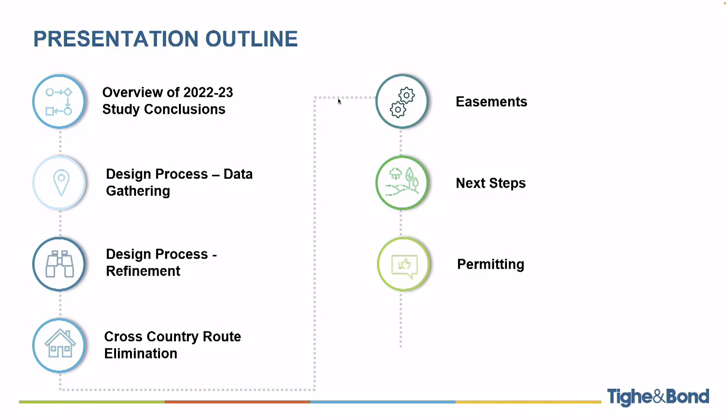And finally, as Ed said, we'll wrap up, and then feel free to ask questions—we'll provide our answers to the best of our ability. If we don't have an answer for you tonight, we will get back to you.

To recap our presentation from May 2023, some key takeaways: the existing storm drainage system in the Saltbox Lane area is extremely undersized. It only handles a 2-year event, which is about 3 to 4 inches of rainfall in a 24-hour period. For reference, the Town of Darien design standard is a 25-year design storm—you're up at about 5.5 to 6 inches of rain in a 24-hour period if that system were designed today.

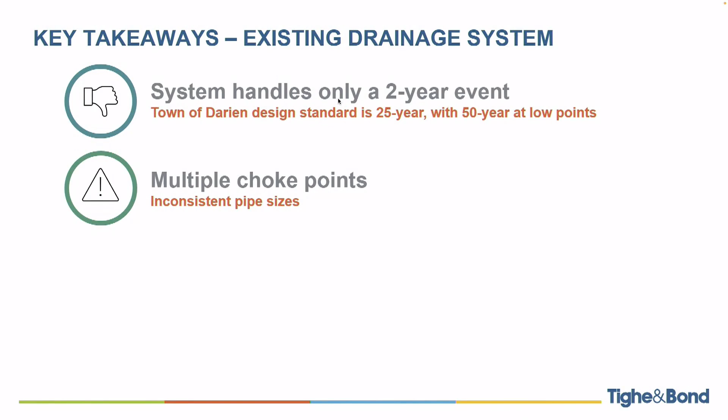Also, at low points, there's a 50-year standard in Darien. The system also has multiple choke points—pipe sizing is inconsistent. You'll have a smaller pipe go into a larger pipe, and that larger pipe go into a smaller pipe again. Never a good thing. There's also increasing precipitation depth and frequency.

Most of you who live in Darien have probably experienced it—the storms are more intense now, we're seeing more rainfall, and it tends to be more intense. That's changed since this system was first constructed in the 1950s. The final key takeaway is that there are certainly opportunities for improvement—not only increasing pipe sizes, but also improving sediment capture and other opportunities for water quality improvement.

So some of the conclusions we had from our study: because most of these streets in the Saltbox Lane neighborhood were built out in the 50s and 60s, they were designed to the standards in effect back then. As we know, rainfall has gotten more intense, and they've just become undersized as weather patterns have changed.

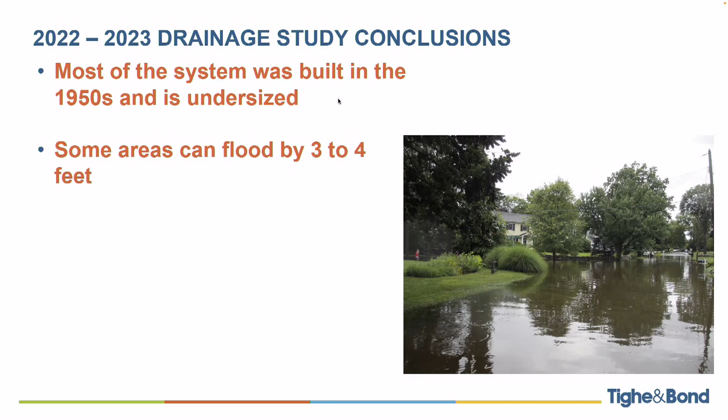We've also found, based on photo documentation, that some areas can flood by about 3 to 4 feet of water. It's not there for days on end, but an intersection still goes underwater. It is a problem for emergency vehicles, so that's something that needs to be addressed.

The other thing we found is that a lot of the catch basins don't have adequate sumps. The sump is the portion of the catch basin below the lowest pipe that enables debris, such as road sand or leaves, to be captured in the sump instead of being discharged out through the pipe.

Finally, because of the number of low points along these roadways on Saltbox Lane, Coach Lamp, and Du Bois, we recommended a 50-year design for the entire pipe network. Remember, the town standard is a 25-year design.

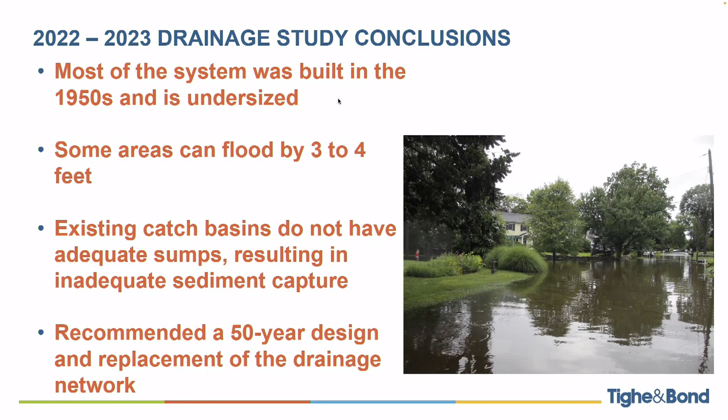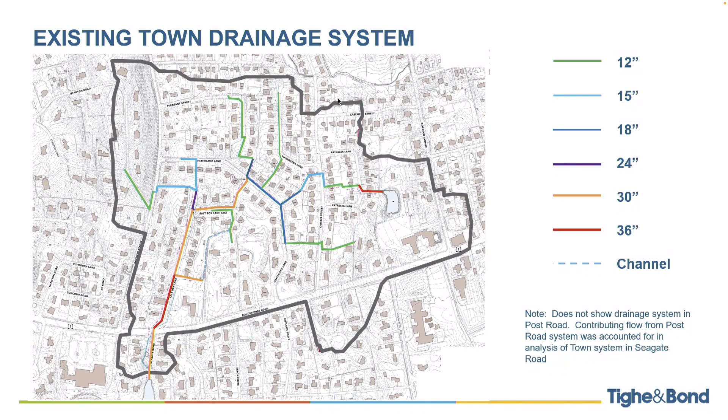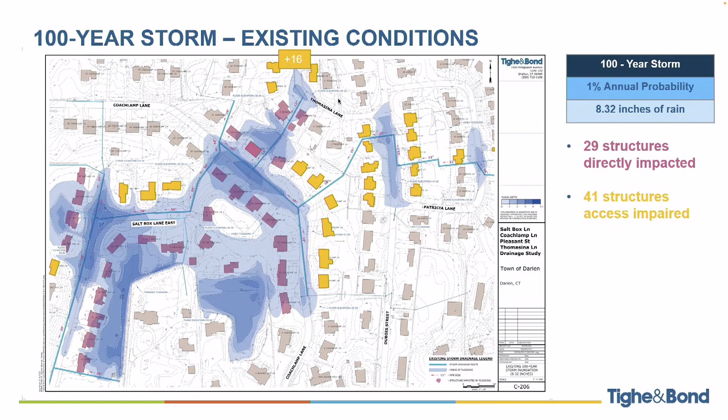Now for a 100-year storm, you can see how that grows, because we go from a little shy of 7.5 inches of rain to 8.3 inches of rain in that same 24-hour period. The number of structures directly impacted increases to 29, shown in pink. Then 41 structures are access impaired, including 16 up here on Thomasina that are off the graph.

So the proposed system: here we have a box culvert that comes down Saltbox Lane from the Saltbox Lane East intersection. It measures 5 feet wide, 3 feet high, and it comes across the Post Road and then discharges down Seagate Road into Holly Pond.

You can see we're increasing a lot of the pipe sizes to larger pipes. You have a 48-inch coming down Saltbox Lane East, which used to be a 30. But the key takeaway is our model does not show any of the catch basins with surcharge in a storm event. The dashed darker blue line is the extent of the 50-year flood under existing conditions, and you can see we're not expecting any ponding in the 50-year event.

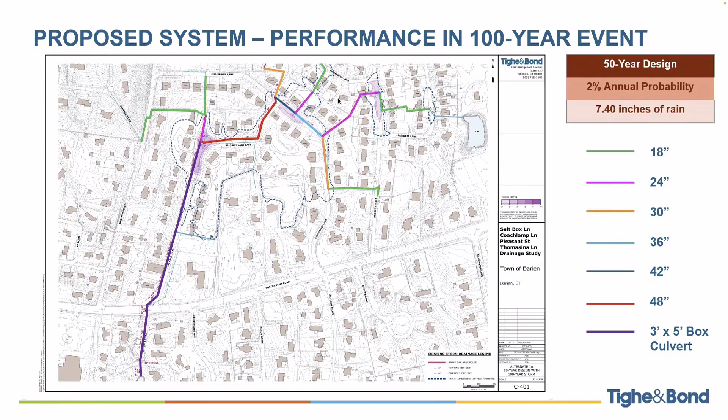We also looked at the proposed system's performance for the 100-year storm event. I apologize, this graphic is incorrect - I just noticed this should be 100 here, 1%, and 8.32 inches of rain. You'll see areas of purple here, here, and here - those are areas that would flood, but the flooding is 1 foot or less. If you compare that to the present limit of flooding expected for the 100-year event, you can see that this would shrink that quite a bit.

So I mentioned pipes and box culverts. I want to clarify the difference between the two. Pipes are traditionally what you think of - they're round. In this case, we're looking at either reinforced concrete pipe, or for some of the smaller pipes, PVC. The key advantage is they're readily available, easier to install, and lower cost. They don't carry as much as a box culvert, though.

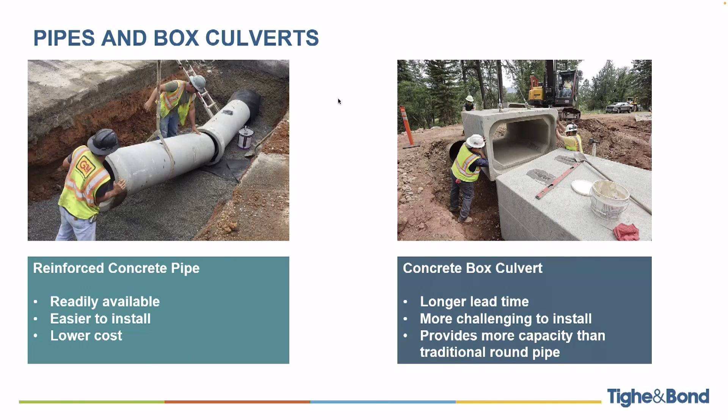The concrete box culvert has a longer lead time. It's more challenging to install - you can see you got 2 guys here, and 3 guys in this one - just because it's larger and heavier. But the key advantage is that it provides a lot more capacity than your traditional round pipe. That's why we selected the box culvert to go down Saltbox Lane and down to Seagate. Otherwise, we'd be looking at a pipe that was probably about 5.5, maybe even 6 feet in diameter.

So that was an overview of our study recommendations. Since that time, we've started the design. There was a selected alternate, and we've moved forward with that. In order to design, we need a lot more specific information than we would need for a study, so the first step was having a topographic survey and a utility survey done of the work area.

That's been completed, and what that does is tell us the elevations of the road along the entire length of the project area. It also tells us how deep the pipes are, what the rim elevations are, where utilities are - not all the utilities, but it's the cornerstone of the design.

Then there's a field review. We review the survey, and sometimes there are things that don't make sense, so we'll go back out in the field, take a look, and make notes and adjustments based on that.

And there are things you can't see - we can't see into the pipes under the ground. So if there are additional questions, like where does this pipe really connect, the surveyor can't really see where it goes. So what we do is video record certain pipe segments that we still have questions about, and we did that process.

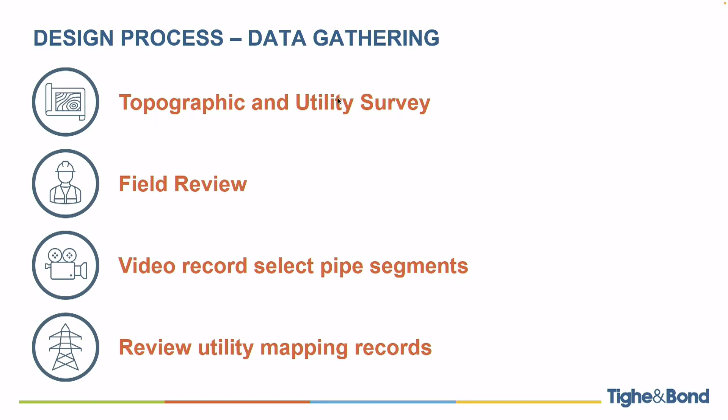Although our survey does have utility information on it, we also go back to the utility companies and get their mapping as well, just to see what's changed or if anything might have been missed on the survey. We've completed all those steps. With the utility mapping, it's important to understand where the utilities are to try to minimize conflicts, to make sure we're not installing pipe right through an electric duct bank or something, because that would only slow down the construction process.

We want to keep that moving as efficient as possible, so that's why we take a look at the utility mapping. We do have some potential conflicts we're working with Eversource and Aquarion on between some underground electric and some water mains, and we're working through that process. Requesting utility mapping also alerts the utility companies to the project - we reached out and got mapping, and you'll be surprised at the number of utility companies we had to contact.

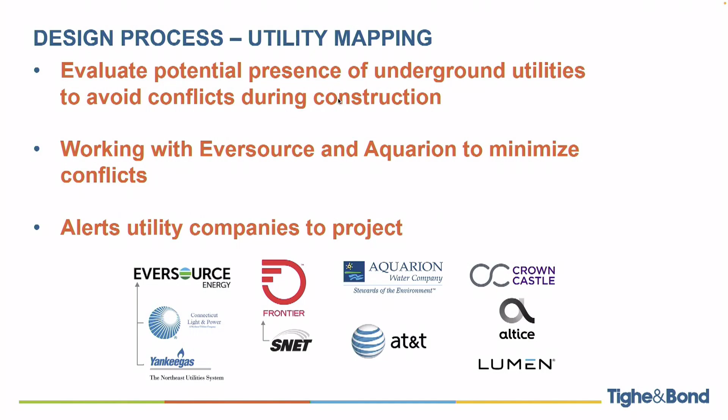Some of these I didn't even know existed, but we were made aware of it, and we did get information from them. So all that is information that we use to bring into the design.

I want to reiterate our design goals. These are our primary design goals. The first, obviously, as a drainage project, is to reduce flooding. The other is minimizing construction impact. The way we lay the pipes out, how deep they are, it all has an impact on how things are constructed, so we want to do that as efficiently as possible. We try to minimize the impacts on roads and minimize detours. So those are all things that go into the design process.

Also minimize easements. Easements are costly. It takes time to get them, and it's always better to have something you can maintain in your right-of-way to the extent that you can. Sometimes that's not always possible due to topography or other reasons, but we try to minimize them where possible.

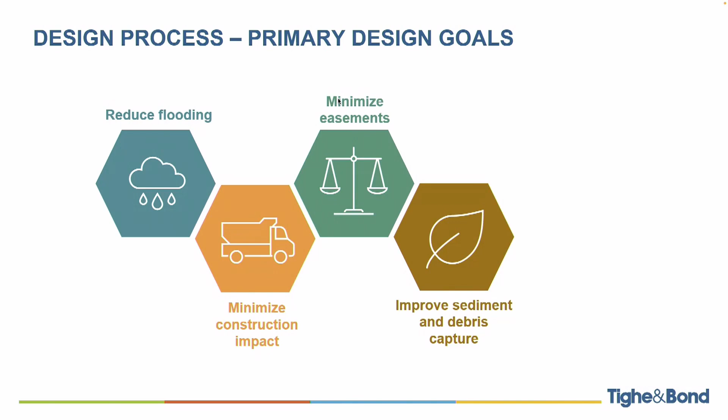In addition to being a flood reduction project, this also is an opportunity to improve water quality. So some of the things we look at are the types of basins we're replacing, to improve sediment and debris capture, and how we can minimize the amount of sediment that's being transported to the system and ultimately to Holly Pond.

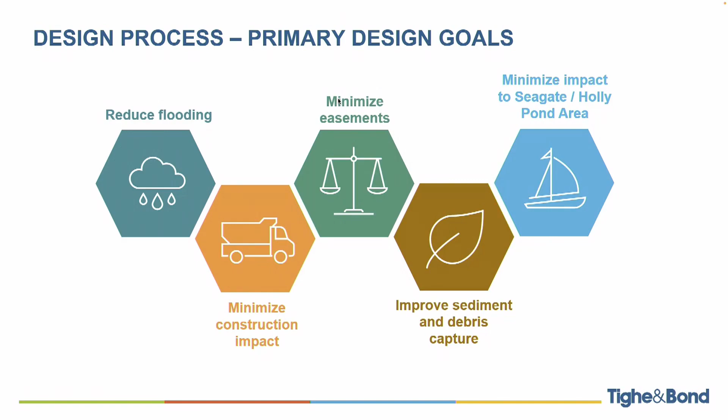Although this is a real flood reduction project for much of the study area north of the Post Road, south of the Post Road in Seagate Lane it's a little different. They're affected differently and don't have the flooding issues that residents north of the Post Road experience. So it's important that we're also sensitive to their concerns, and we've had a few meetings with the neighbors there.

So we have all this information. We start to place our pipes on the plans, try to figure out the best way to connect them and where they should go, and then we start to refine the design.

The first consideration is the horizontal alignment of the pipes - where the pipe fits in the roadway and how it connects to other pipes. Here again, reduction of easements comes in, and we also have to consider traffic operations.

If you run a pipe straight down the middle of the road, you're probably going to have to close that road for construction, which would unduly burden residents. So what we try to do is shift that pipe to one side of the road or the other, so you can have at least alternating one-way traffic.

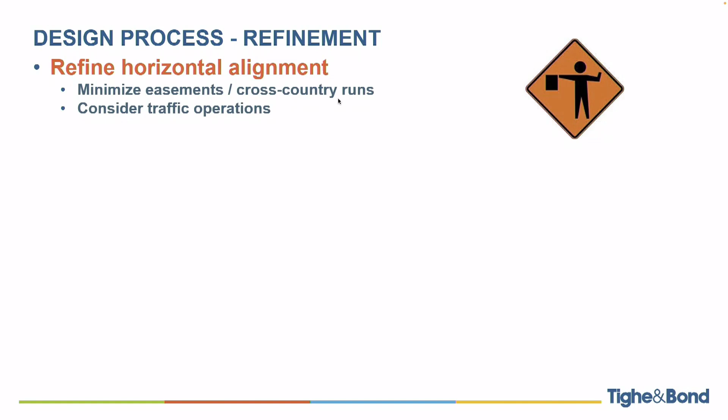There will be times where the contractor might reach out to a resident to understand their schedule, since they might need to block a driveway temporarily for a couple hours. We obviously try to keep that to a minimum, but that's unfortunately a reality of construction.

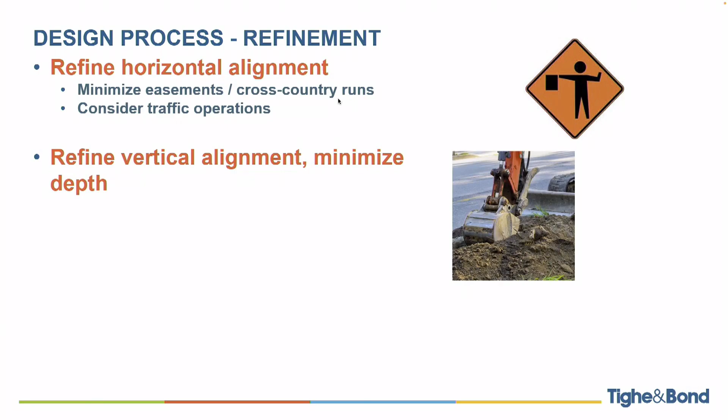We also look at the vertical alignment, which is basically how deep the pipes are. We want to minimize the depth, but also place them to minimize utility conflicts. If we put a pipe too high, we might conflict with underground electric. If we put it too low, it could be too deep, causing additional construction expense, or it could conflict with sanitary sewer. So there's a lot of different things we look at there.

Adjusting for utility conflicts is another consideration. If you're trenching on one side of the road or the other, you might be close to a utility pole, so we have to call out on the plans that certain utility poles need temporary support during construction as they trench past that pole. We also look at edge impacts.

There are a lot of driveways in the area, so we have to be cognizant of what we're disturbing - driveway aprons, making sure that if we're disturbing Belgian block aprons, the homeowner is aware of it and that it's reflected in the contractor's bid price, as well as mailboxes getting reset, curbing, and things like that.

As part of the project, one of the very first tasks the contractor will have to do is an existing conditions survey, which is basically a video of all the existing conditions along the roadway.

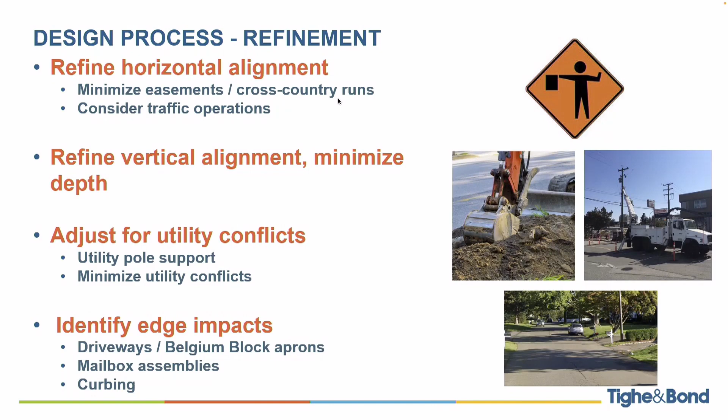So that said, we've been working hard. Our staff has been working hard, and this is the proposed drainage network. It's very similar to the slide I showed you earlier. Probably the principal difference here is this drawing is rotated 90 degrees, so north is to the right.

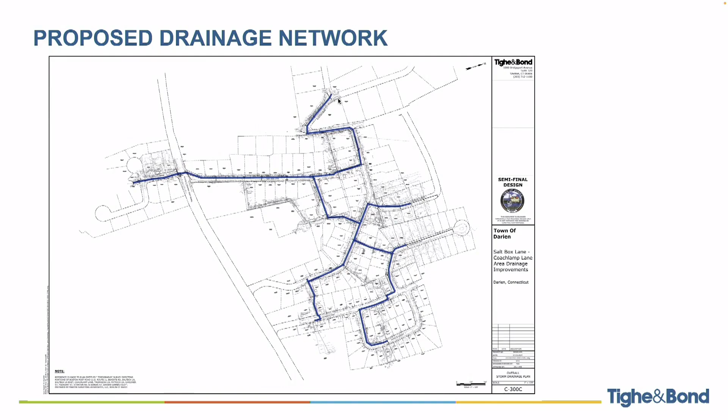So we have Seagate right over here, Salt Box, and then Stanton's over here. So we have a cross-country connection here, one from Coach Lamp to Salt Box East here, another one from Thomasina down to Coach Lamp, and then from Du Bois over to Coach Lamp.

What you'll see in the next slide is we were able to eliminate some of these cross-country routes by essentially going around the property because we had the opportunity. The first is coming from Gardner down to the end of Salt Box. There's an existing pipe that runs through here. We found that if we took the pipe down Gardner, down Coach Lamp, and then utilize an existing easement, we could avoid having to run new pipe on those properties.

Same thing here at the end of Pleasant. The existing pipe actually heads to the east and then takes a sharp turn to the south, back up to Coach Lamp. The town owns a small piece of right-of-way that connects the end of Pleasant to Coach Lamp, so we can bypass that. Another one that we're able to bypass comes from Du Bois, straight out to Coach Lamp.

It goes through, you can see these properties here. What we're able to do was by taking the pipe and storm drain and running it down Thomasina, down to an existing pipe crossing, we were able to eliminate that one as well. And then finally, the last one we were able to eliminate was going through a few properties here on Patricia Lane. We were able to route it around.

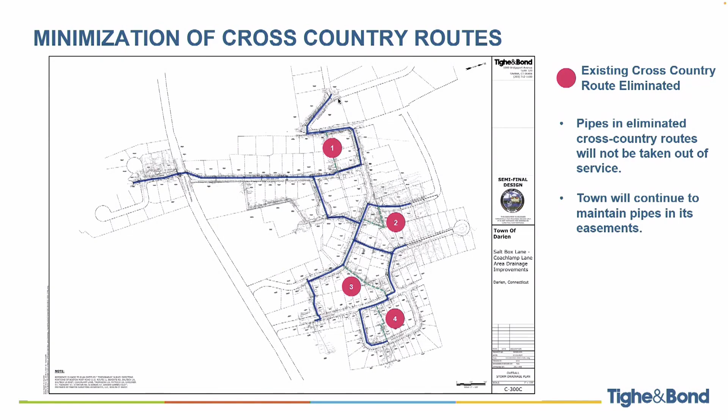One of the key things here is the pipes that have been eliminated in these cross-country routes won't be taken out of service. Those pipes will remain, and the town is going to continue to maintain the pipes within its easements. So even though we're not replacing it, it becomes part of the overall drainage network, just becoming supplementary instead of a main conveyance for the storm drain.

So easements, just to clarify, easements allow for legal access to a property for a specific purpose, in this case for construction of storm drains. Some properties already have easements for the purpose of storm drains, but the project will require from some properties an easement to construct and maintain a storm drain.

Another type of easement the town would be looking for is a temporary easement to allow construction of a storm drain. So the storm drain might not be physically present within the easement, but there might be an area of the property where the contractor might need to work to allow them to access the trench within the permanent easement.

So the town has sent letters to property owners where the easements may be necessary. If you feel there's an easement on your property and the town hasn't contacted you, please feel free to reach out to either Ed or Darren.

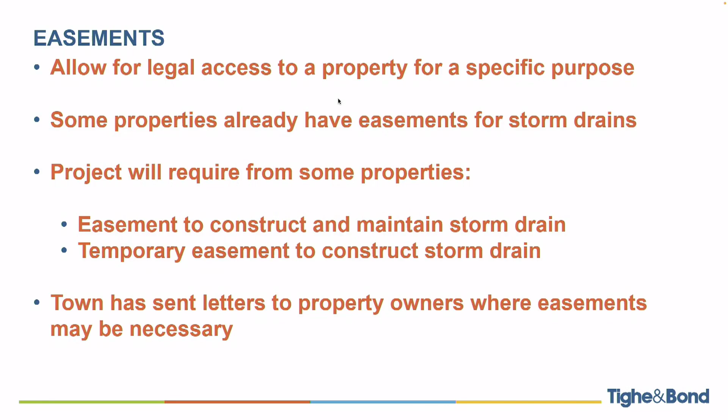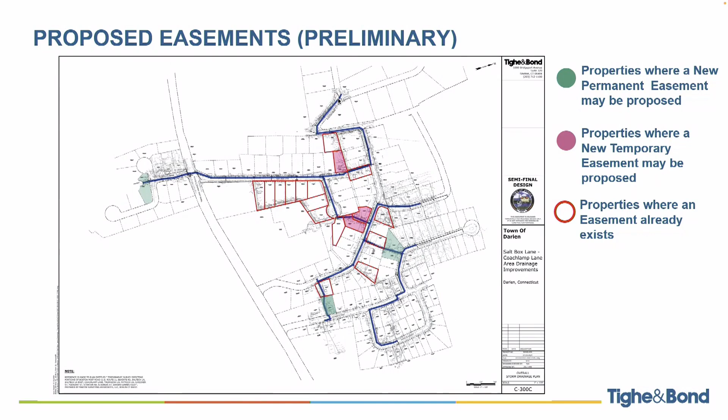So that's where we are. The next steps are, first of all, we're about 70% of the way through our design.

The whole system ends up discharging to Holly Pond, so we have to design an end wall there. Because of the coastal nature and uncertainty about the soils, we have to obtain boring data for the proposed box culvert end wall. The end wall will stabilize the box culvert and keep it from moving up and down with the tides.

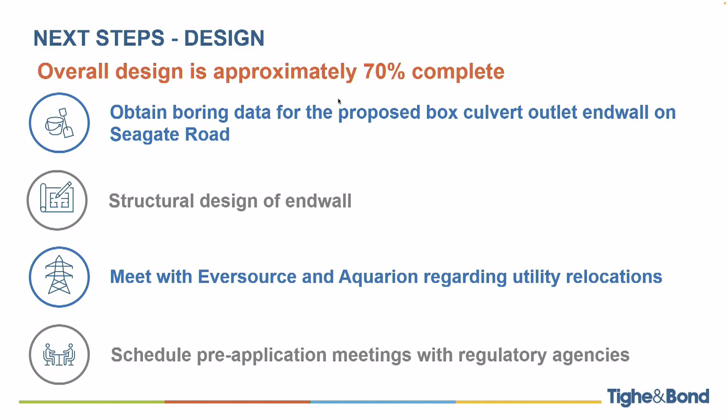We've been working with the neighbors to secure an easement for that, and we'll also have to do the structural design of the end wall once we get the underlying soils data. We have to conclude our meetings with Eversource and Aquarion regarding utility relocations, and then schedule our pre-application meetings with the regulatory agencies. So those are the immediate next steps.

Since I spoke about permitting, I can give you a refresher on what's going to be required. Locally, we will require an inland wetlands and watercourses permit from the EPC, probably about 2 to 3 months.

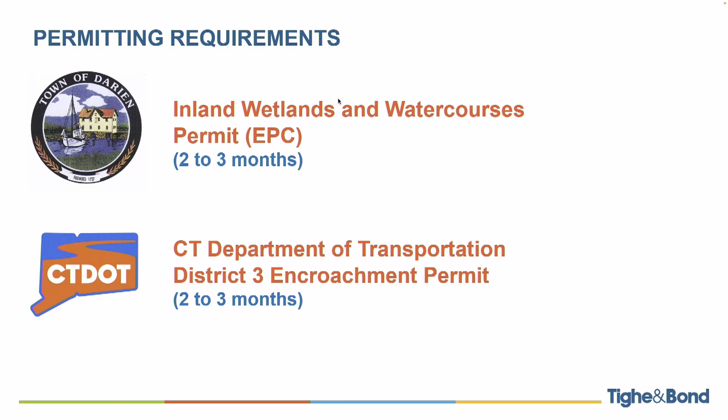We're crossing the Post Road, because we'll be working in the state right of way, so we'll require an encroachment permit from the District 3 office of the Connecticut Department of Transportation. That'll be 2 to 3 months, and these can be applied for simultaneously. All these permits we plan on applying for concurrently.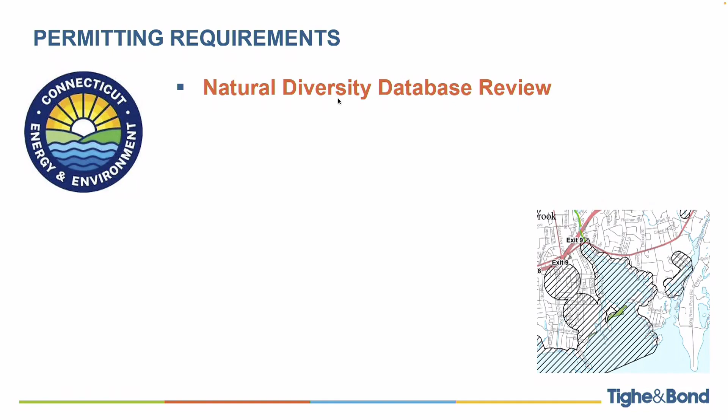Probably the heaviest permit lift on our end is from the DEP. The first thing we have to do is a natural diversity database review. We'll be submitting for that shortly. Basically, it's a consultation with DEP's wildlife people to screen for the potential for endangered or threatened species.

You can see here in the lower right a map of the DEP's endangered and threatened species database, and all of Holly Pond is an area of concern. That's why we have to submit for the consultation. That doesn't take too long—you usually get an answer in about 2 to 3 weeks.

The other thing we have to do is a structures, dredging and fill permit because we're working in tidal waters, and a tidal wetlands permit because we're working in tidal wetlands. One's related to the structure, the other's related to the disturbance within the tidal wetlands.

Because we have to apply for an Army Corps permit for the modification or replacement of the existing end wall, we're required to apply for a 401 water quality certification as well. That process would take about 6 to 9 months.

Before we submit for our state permit, we have to submit for a historic preservation review from the state of Connecticut. As part of that, we also submit to the Mashantucket Pequot tribe as well as the Mohegan tribe, because the conditions of the Army Corps permit require submissions to those three entities. Typically, that review takes about a month or so.

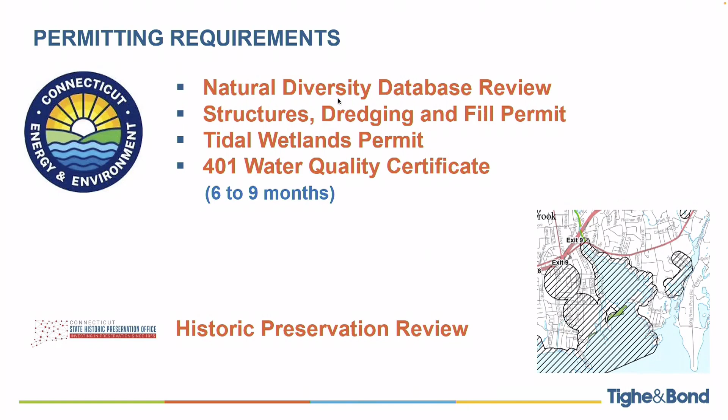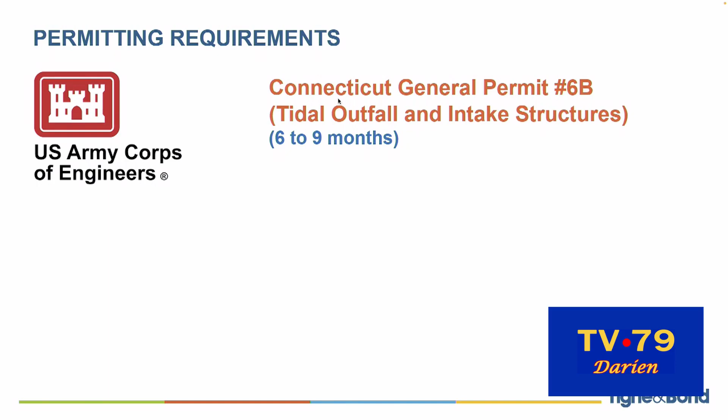Finally, I mentioned Army Corps—we expect to be eligible for general permit number 6B. The Army Corps has what they call a Connecticut general permit, broken down into 21 or 22 categories. Category 6B is related to storm drainage outfalls.

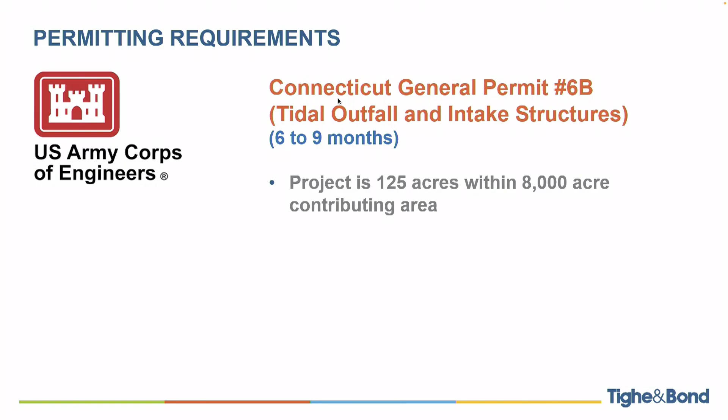The Corps will really be interested in the localized impacts. They won't be so concerned with flooding, particularly considering the project area is 125 acres and the contributing drainage area to Holly Pond is 8,000 acres—so the project is about 1%, maybe 1.5% of the total contributing area. Their focus will be on the immediate impacts at the outfall.

Those plans, just like this permit application, just like the DEP application, require a defined plan with clearly stated limits of disturbance. Some of the other things they'd be looking for is some characterization of the material removed—is it muck, is it sand, what's it composed of. This particular permit needs to stay under the pre-construction notification regime, which keeps us in this 6 to 9 month time frame.

Our area of disturbance of the tidal wetlands will have to be half an acre or less. If we exceed that, it kicks us into an individual permit, which could take 1, 2, 3 years. I have a project in Bridgeport—we're on year 5 of trying to get our individual permit.

So there's three different paths in the Army Corps permitting process under the Connecticut General Permit. There's self-verification—you submit something saying you're doing this project, and if you don't hear from them, you're good to go. There's pre-construction notification, the middle ground, which requires internal review but isn't very rigorous. And then there's the individual permit, a very fully detailed review. No tidal projects are eligible for the self-verification route, the easy route.

So we're going with the middle route, which is the only one that's available.

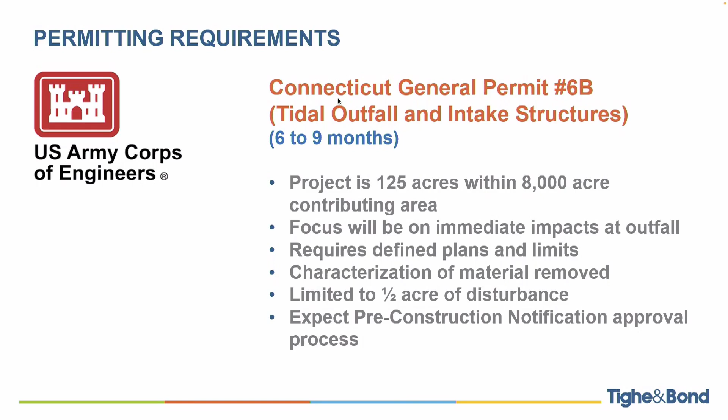So the next steps, once everything falls in line with the permitting, we incorporate our conditions of approval and any feedback we get from the agencies during the review. We do our final coordination with utility companies to make sure nothing has changed on their end. The last thing we want is to install our pipe, mill and pave the roadway, and then have the utility company say they're replacing the gas mains or something like that. So we want to make sure we're coordinated with them and that they understand our schedule. Complete the easement documents.

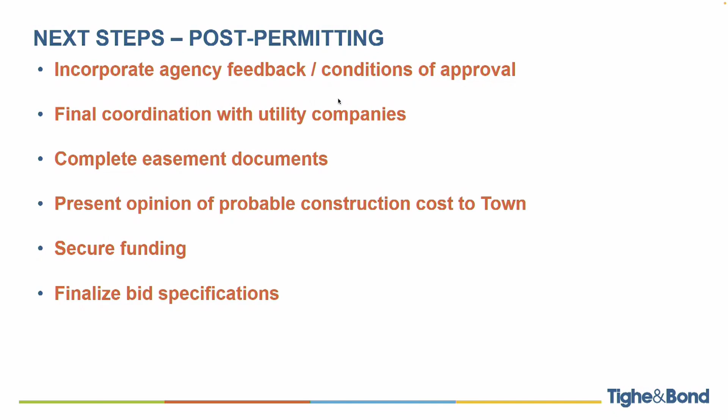Then, as part of this, we have to present our final opinion of probable construction costs to the town—essentially the engineer's estimate of what the construction cost will be. The town needs to secure the funding to make sure it has funds lined up to proceed with the project. Once that happens, we'll finalize the bid specifications, which are the written instructions to the contractor. Those end up being like 600 or 700 pages—it's quite a document.

Once all that's done, the project can be released for bid. Our current thinking, based on the timelines and where we need to go, is that we expect this to be released for bid in June 2026. That is subject to the town approving funding for this.

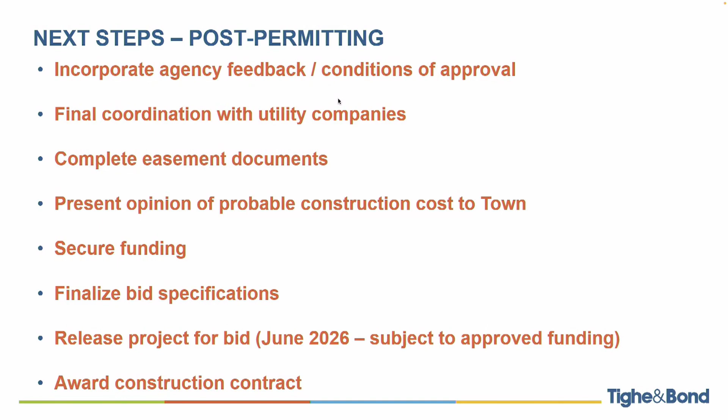Finally, once all that's said and done, the project can be awarded through the bid process and a contractor comes on board. So what should you expect during construction? We anticipate it'll take about 12 months from start to finish, excluding winter shutdown. You might be fortunate enough to have a contractor, or a very warm winter, that decides to just keep working. We've seen a lot of that over the past few years.

Since it's a drainage project, we always start at the downstream end and work our way up. Access to properties will be maintained at all times, within reason. There might be times where a contractor needs to work with a property owner to let them know they might need access from, say, 11 to 1. There might be a time where you can't get to your property.

The contractor is also required to deploy sediment and erosion controls. This is a town project, so it should be an example for all the other contractors working on projects in town as to what to do. So the town will be looking very closely at that.

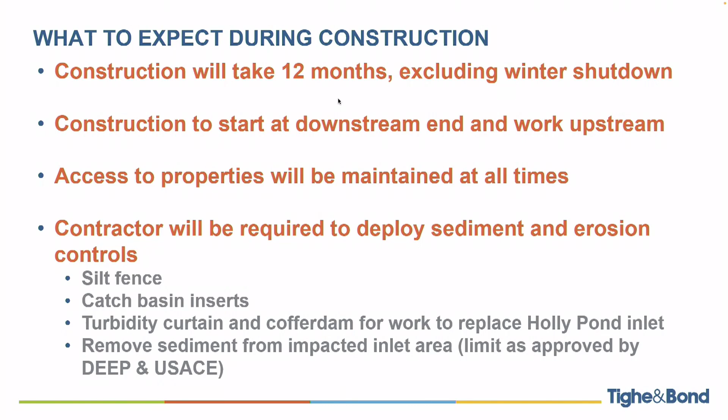Some of the measures would include silt fencing, catch basin inserts—which is basically filter fabric placed in a catch basin to prevent debris from washing in—a turbidity curtain, and a cofferdam, since we're doing work at the Holly Pond Inlet, which requires some specialized water handling approaches. At the end, we'll remove sediment from the impacted inlet area, within the limits approved by DEEP and the Army Corps.

So with that, that concludes my presentation, and I'd be happy to open it up to questions.

I don't know, do we have a specific procedure for how you want to handle that, Darren? Just go up to the microphone.